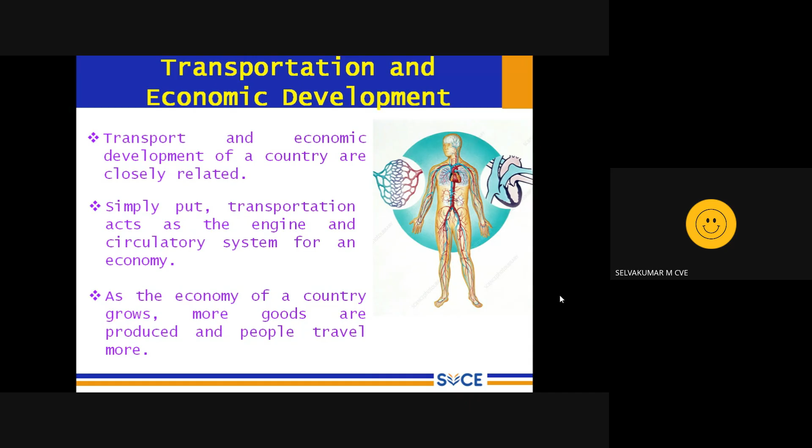India's economy, for example, is growing at 8% per year on average, and its road transport is growing 10 to 12%. Here I am only quoting road transport. Similarly, air, rail, water, all modes of transport are growing in parallel. Air transport is growing even faster. The Government of India is focusing on developing airports in tier 2 cities, so people prefer to travel by air to save more time, and that time can be used for economic development.

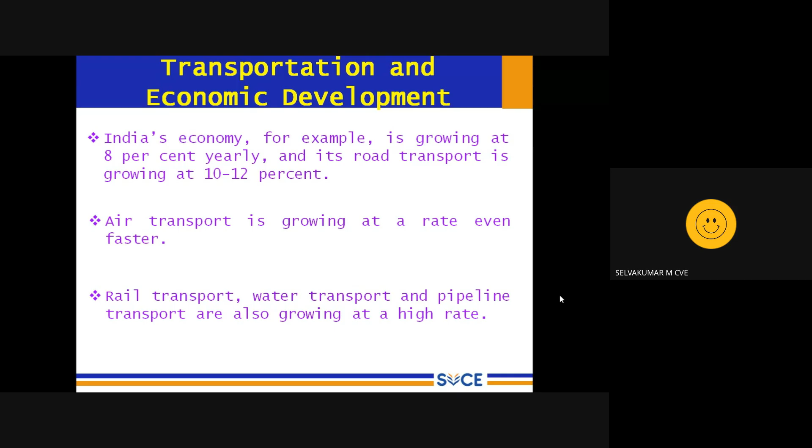Rail transport, water transport and pipelines, which are also a mode of transport, are growing at a higher rate. India has a very large rail network of around 80,000 kilometers. The Government of India is also very keen to develop water transport. And petroleum gases are transported through pipelines over long distances without depending on other modes of transport, so that also comes under transportation.

The existing stock of roads, railways, ports, airports and pipelines in India is proving inadequate to meet the growing demand. We are already developing roads, widening them from 2 lanes to 4 lanes, 4 lanes to 6 lanes. National highways are widened, expressways are under construction, bullet trains are in progress, and ports are also developing. Even so, we are lagging and not keeping up with demand. Supply should always be at least equal to demand, but since ours is a populous country, demand surpasses supply.

So the capacity augmentation is proving to be very costly and time consuming. It is soon overtaken by traffic growth. So in India, in a majority of the cities, the metros are under construction, bullet trains are constructed, the roads are widened. It takes more time. You take the Chennai Metro, it is past 10 years. Chennai Metro is under construction, and also it consumes huge, tremendous funding. The fund is required.

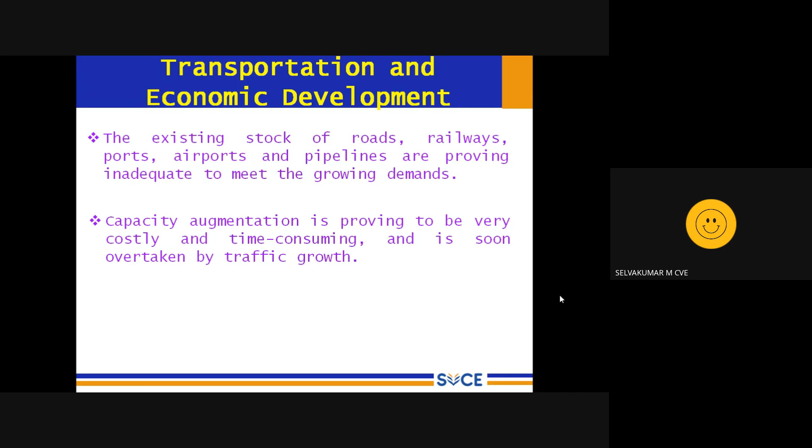As I said, the four-laning program was initiated in 2001 under a program called the National Highway Development Program, where many 2-lane national highways were widened to 4 lanes, and similarly 4 lanes to 6 lanes. So it is an excellent project. And also they started constructing the access-controlled expressways. That means the roads are not directly connected to the main road; they are connected using ramps. So the vehicles entering the expressway are almost matching the speed of 120 or 100 km/h, so that they smoothly merge with the oncoming traffic.

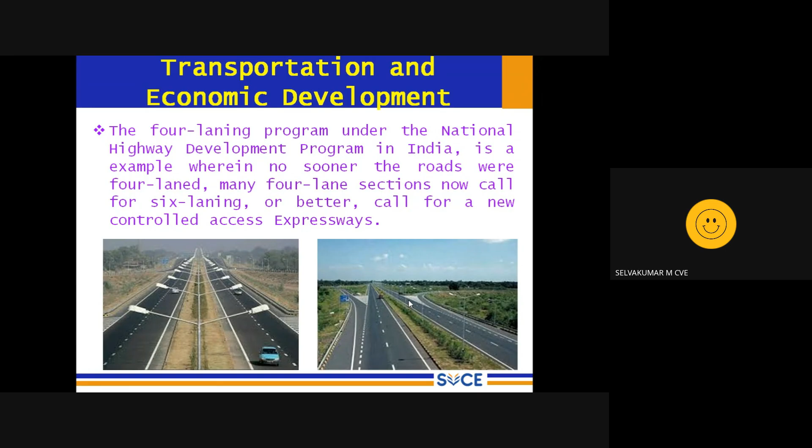These innovative approaches are needed to optimize the investment. So now I am coming to the point. We are making a huge, enormous investment in these road and rail projects, so this investment should be properly and effectively utilized. For this, the application of information technology, computers, or management. The application of information technology in transport is receiving worldwide attention under this context. Starting from civil engineering planning up to execution, even during operation, we are depending on computers. So it saves a lot of time.

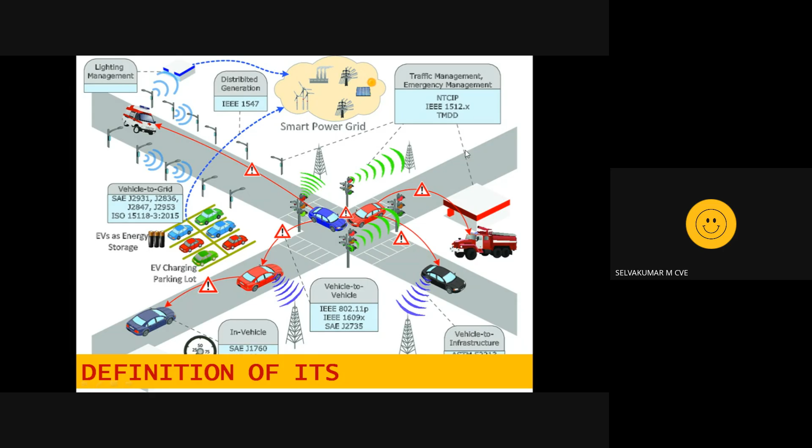Okay, so the parking: you can see the EV charging parking lots, where parking facilities are provided along with EV charging stations. And when any emergency vehicle like an ambulance is coming, that will be communicated to the next vehicle, so automatically they give way for the emergency vehicles. There are many markings given, like communication happening with a tower. There is a traffic control center, and they communicate between the signal and the traffic control center. So this is the overall definition of ITS.

So what they are saying is that intelligent transportation systems are applications which aim to provide smarter services for transportation and traffic management systems by using information and communication technologies to improve the efficiency, so you can transport quickly, economy, saving money, safety, no accidents, and sustainability of transportation networks, and thus reduce traffic congestion with enhanced drivers' performance and travelers' experience. So this is the broad definition. It not only ensures the efficient, fast, economical and safe movement of goods and people from one place to another, it also enhances the driver's performance.

So, historical development of ITS. Here we are going to see the three phases of the development of intelligent transportation system. They described it like this: phase one, way back from 1960 to 1980. Phase two is from 1980 to 1994. Phase three is from 1994 onward. So can anyone guess why this kind of division is given?

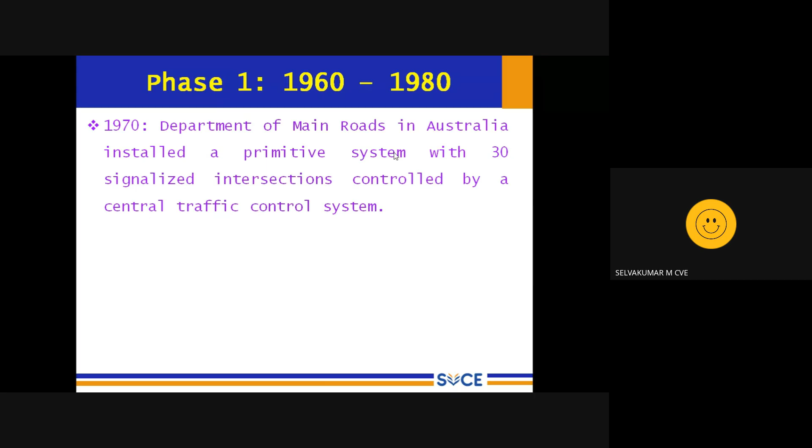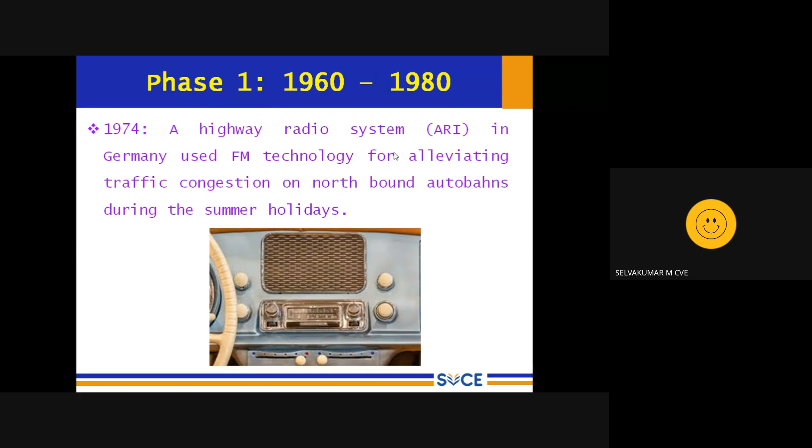In phase 2, they are moving to the electronics and communication era. So there were several technological reforms in mass memory, the storage. In traffic, we know that enormous data needs to be recorded on a day-to-day basis, even minute-wise, second-wise, continuously, 24 hours, 365 days. So huge data you need to store, so mass storage devices are mandatory. And you need to process the data; processing capacity and communicating systems took place in different countries during the second phase of development from 1980 to 1994. So electronic servers came into the picture. In this phase, they were able to store enormous data, but the analysis part was lagging at that time. The analysis was only done by human manpower.

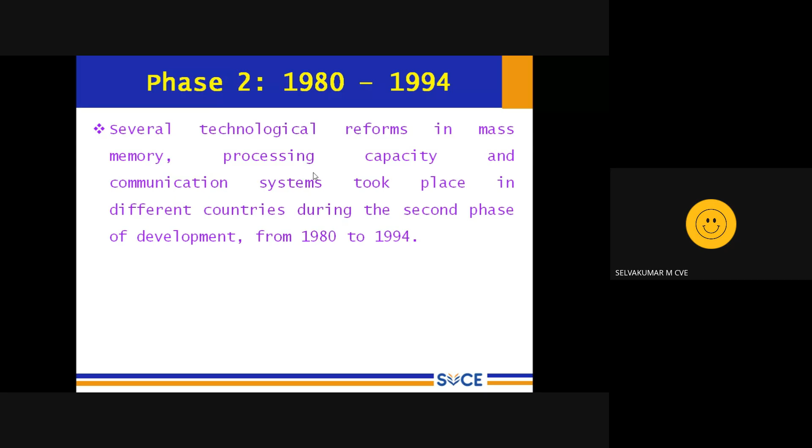But there is also a major milestone, we can say, in ITS. In 1986, a program, Prometheus, for the European traffic system was developed to improve road safety. The program included participation of 18 European automobile manufacturing companies, state authorities, and over 40 research institutions. So you can see the stakeholders here: automobile manufacturers on one side, state government authorities on the other side, and over 40 research institutions also. So that is a collaborative step they took. The program was named Prometheus. The objective is to reduce the number of accidents.

In 1992, ITS Australia, a non-profit organization with various member organizations. This is also the same kind of setup, which included ITS-related electronic manufacturing suppliers, government authorities, academic and transport business, the vehicle manufacturers or sellers, and also users. All were included as stakeholders, and they formed an organization called ITS Australia. Its main objective was to promote development and deployment of advanced technologies to deliver safer, efficient, sustainable transport across all the modes, from cycling and walking to air transport. And they started to research and find solutions for each and every problem.

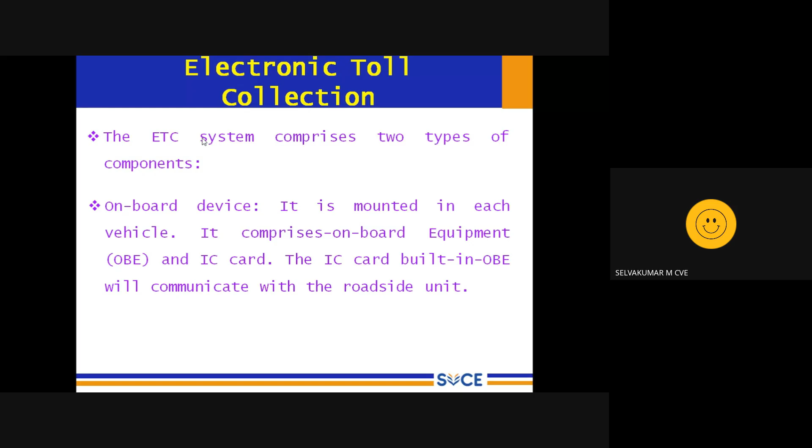The roadside unit is an electronic unit mounted on the ceiling of the toll collection girder. Whenever a vehicle passes under the girder, it gets connected with this electronic unit. Based on the dedicated short range communication unit on the girder, it automatically connects with the OBE, that is onboard equipment, and deducts the toll automatically based on the vehicle type. This is how it operates.

It is an electronic unit mounted on the ceiling, the top of the toll gate or toll booth collection girder, under which the vehicle passes, using dedicated short range communication. The distance of this range is very short, a dedicated short range communication system, which automatically connects to the OBE, the onboard equipment, and deducts the amount. Its operating frequency is given as 5.8 gigahertz band active system. This is how the ETC system operates.

Wherever you are going through expressways or national highways, we are using this. In India, we call it FASTag. As soon as the vehicle approaches the toll booth, very close to the ETC filter, the DSRC detects the OBE, the onboard equipment, and debits a preset amount from the IC card based on the type of vehicle and destination. Usually in India, toll rates are collected for every 60 kilometers, so one toll booth will be there for every 60 kilometers, and it automatically deducts a fixed rate.

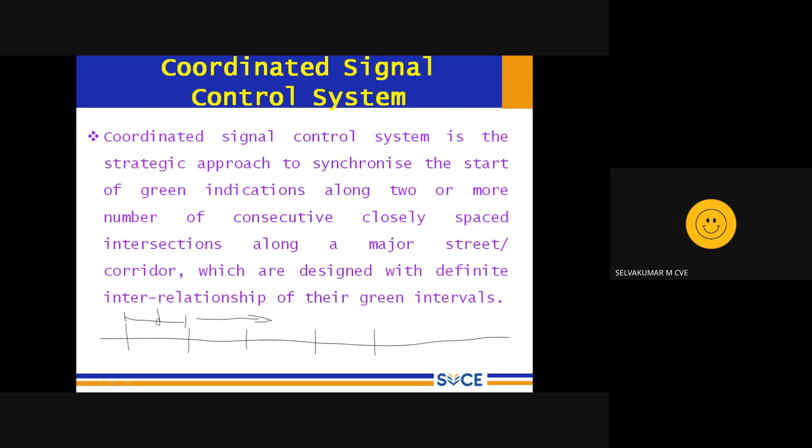The intent of coordination is a strategic approach so that a group of vehicles can travel together as a platoon of vehicles, meaning it moves as a group. So it passes an intersection, and consecutively passes all the intersections like a platoon, and is allowed to pass smoothly along multiple intersections with reduced travel time, minimum delay, and stops.

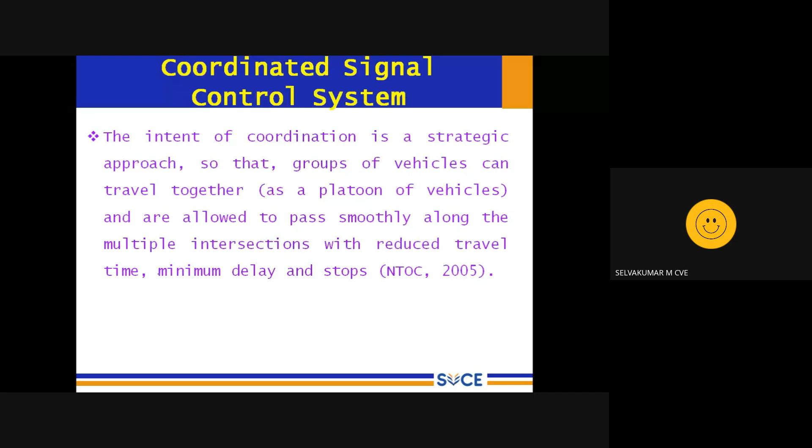This is one of the major advantages of ITS. As a result, since we are avoiding congestion, air quality gets improved along the corridor considerably, and it also reduces fuel consumption.

Signals are the major bottleneck for any corridor. Overall stream speed gets affected due to these signals. So if you have continuous signals, then traffic jams are unavoidable. Once traffic jams are there, obviously it emits pollution, causes air pollution and fuel wastage, time waste, and manpower cost - that is also waste.

So overall economic growth - we can see how it is possible. We are seeing only at the micro level, but if you calculate on a yearly basis, thousands of crores may be lost due to these traffic congestions. So that can be avoided.

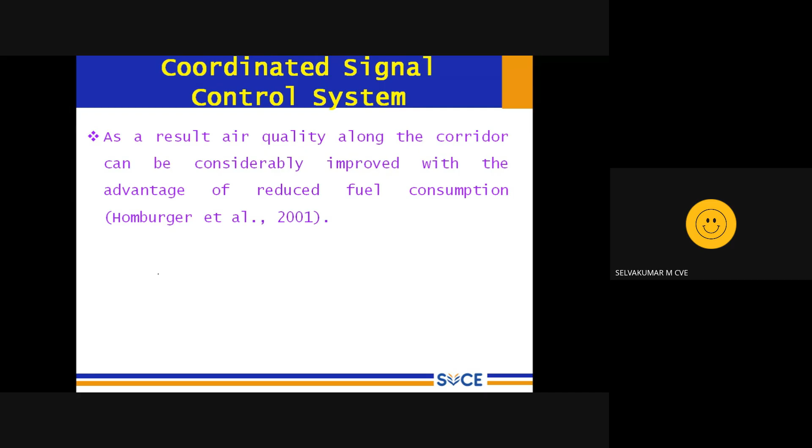To achieve the above objectives, the following requirements are necessary: coordination among the signal controllers with reference to a master clock. What is a master clock? All the signals should follow the same time. Each signal should not have a different time, since then it is very difficult to coordinate.

A master clock should have its time set from the server. All signals should start at zero - it should be synchronized. Then there's the signal timing plan.

The timing plan means the green time - how much green time you are giving for each direction - and what is the amber time. That is called the signal timing plan. It should be stored in the server and accessible by the traffic engineer, so that he can change the signal timing plan at any point.

Equal cycle time - we know cycle time means one complete signal rotation is over, that is one cycle. Suppose it's a 4-arm junction: I open arm 1 with green time, then give amber, then arm 2, arm 3, arm 4. So all the arms I am opening with green time - that is one complete cycle. Normally we use 120 to 150 seconds as the cycle time for one complete cycle of phases, and that should be equal for all junctions.

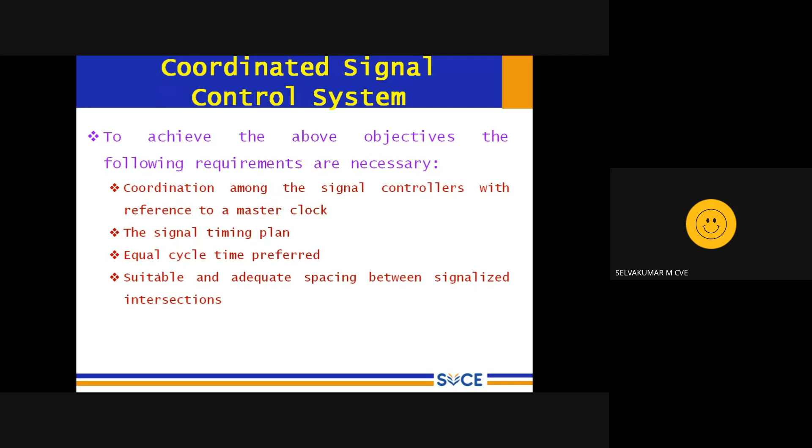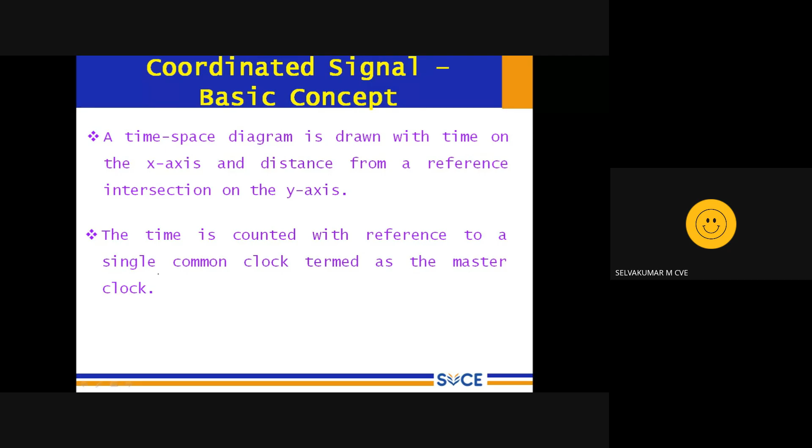A time-space diagram is drawn with time on the x-axis and distance from a reference intersection. I will show you a time-space diagram. The time is counted with reference to a master clock, a common clock.

If you take the slope, that gives the average speed - distance by time. So if you take the slope, that actually gives the average stream speed of the traffic. That's why I said initially, if you know the average stream speed, it is very much possible to coordinate the signal between the junctions.

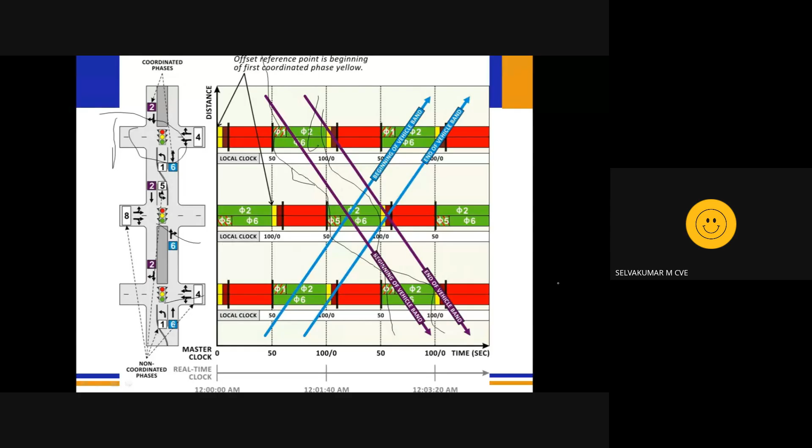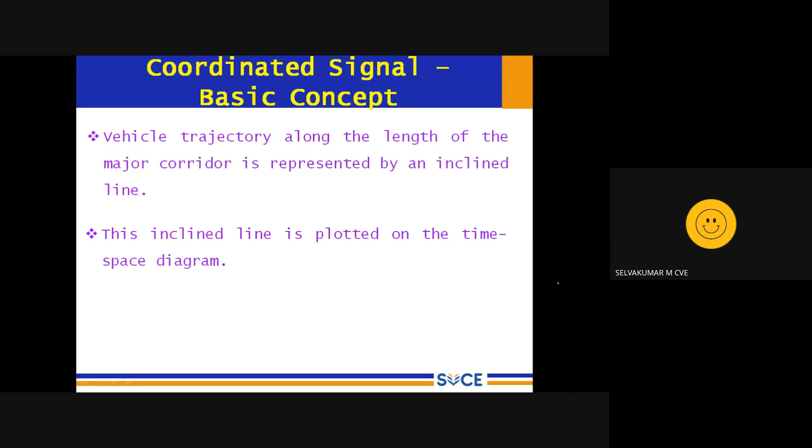So the vehicle trajectory along the length of the major corridor is represented by an inclined line. This inclined line is plotted on the time-space diagram. Then you can calculate the average speed.

The distance between successive respective intersections over the travel time represents the speed of the vehicle, and this is indicated by the slope of the inclined line - it is represented by the operating speed.

Before implementing this kind of setup, you need to conduct speed delay studies at the site. A test vehicle needs to float along the corridor for which you are going to coordinate the signal. Based on the floating car method or some other method, the speed delay study lets you find out the average stream speed.

Based on the average stream speed, and if you know the exact distance between the junctions, then you can calculate the offset time. Offset time is nothing but the distance divided by the average stream speed - put that in and you will get your offset time, which tells you what time it is reaching the next junction.

So based on the offset time, you can open the green signals consecutively, allowing you to move the vehicles continuously.

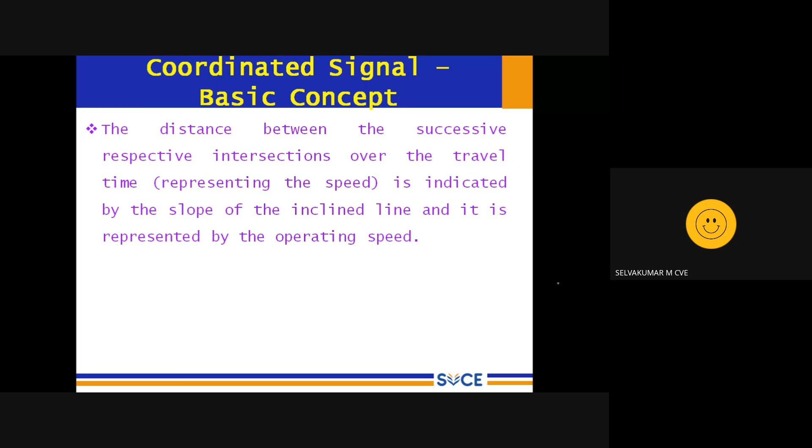It is very important that the plots on the axis should be to scale so that consistency between distance and time units can be maintained. This much, while implementing these things, we need to take care of.

That means it should be drawn to scale - we cannot draw this time-distance diagram without any scale. Only then, if you take the slope, will you get the average stream speed. So both axes should have some scale, where one division equals a certain value.

The vertical distance between two trajectories is the space headway between vehicles, and the horizontal distance between the lines is the time headway between vehicles. So I drew the trajectory - the first vehicle trajectory, and similarly the last vehicle trajectory.

If I take the horizontal distance, since it is a time plot, that gives the time headway - the time gap between the first vehicle and the second vehicle. If I take the vertical component, that is the space headway - that gap in meters, which is the space headway between the vehicles.

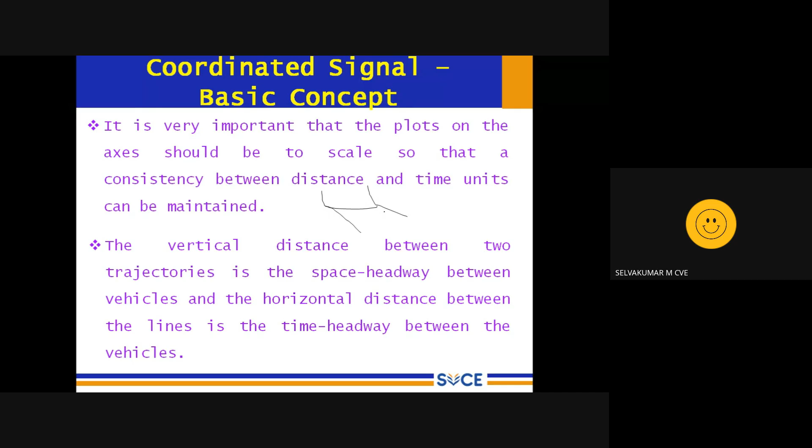And a few applications abroad. Public transportation priority system (PTPS) in Japan, which they introduced long back. PTPS means we are giving priority to bus transport at the major signals, so the buses clear the signal immediately without stopping. That kind of system is called public transport priority system. And red light violation detection system. These two we are going to see.

The Japanese PTPS system secures bus lanes and prioritizes traffic signals only for bus movement through intersections. There is always onboard equipment to identify whether this bus is given priority or not. For example, in Chennai, the government buses are mainly operated by the MTC. So the MTC buses install onboard equipment. At the signal there is a sensor that automatically identifies when the bus approaches the signal, and it extends the green time so that the bus clears the signal without stopping. So this is the basic idea.

Priority passage of buses through intersections and along specified routes is facilitated so that high volumes of public transportation move efficiently. So the public transport buses will move at a higher speed compared to cars. Imagine cars need to stop at the signal, two-wheelers need to stop at the signal, whereas buses are given priority. The buses go at a higher speed compared to cars. So naturally people move to the buses, since they go at a higher speed compared to a private vehicle like a car. That is the main motto of these kinds of programs.

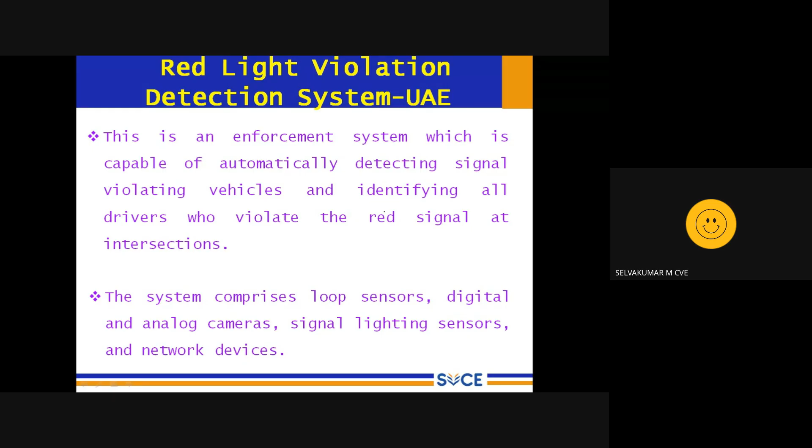The system comprises loop sensors, digital and analog cameras, signal lighting sensors, and network devices. These are various components which are needed for a red light violation detection system. The loop sensors which are installed on the road detect the vehicle. The presence of the vehicle has to be detected, right? Its speed also it calculates.

A high resolution digital camera captures the license plate. The digital camera has high resolution, so it should be accurate, it should be clear. The license plate should be clear. All the registration plate details should be there in the traffic control center, so that automatically you can send the SMS to the concerned mobile number.

A secondary analog camera is also installed to record the image of the moving vehicle. So whichever vehicle is crossing the red light, another camera also captures the image of the vehicle as evidence. So this is the red light violation detection system.

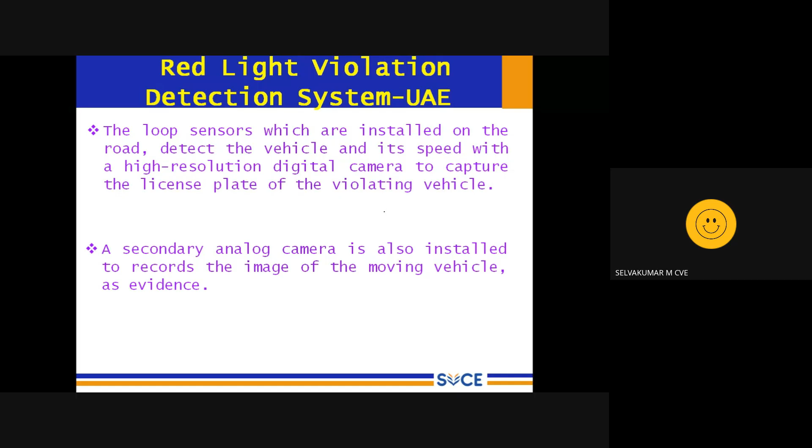The other technologies: the global positioning system, GPS, day to day we are using in our mobile phones. Even public transport buses you can track using GPS. And Where is My Train, there is an app from Indian Railways. Using GPS you can track where the train is, so accordingly you can plan your trip. So in all modes we are using GPS. Even for booking taxis we are using GPS. Unavoidable technology, one of the major technologies.

And traffic simulations. Since it's a computer era, traffic simulations play a very important role. Like VISSIM, that is one of the simulation software, where you can simulate any kind of conditions. For example, at an intersection, if you plan to construct a flyover, you can simulate. Even the vehicle sizes, dimensions, exactly to our Indian conditions, you are able to simulate the traffic.

If you know the road geometry, suppose you are planning to introduce a flyover, what is the impact? How much travel time is going to be saved? How much fuel is going to be saved? Whether it is worth investing or not. So without directly implementing on site, you can do the simulation study before implementing and find out whether it is feasible or not. Accordingly, we can take decisions. So traffic simulations are very helpful nowadays, and for major projects even the government is requesting to submit traffic simulation output as a justification.

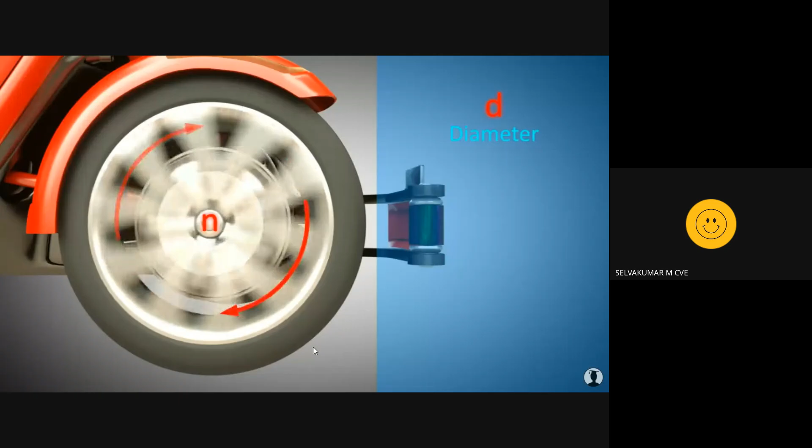I can copy paste this link. I hope you have seen the short video on the autonomous vehicle. There are so many videos on YouTube.